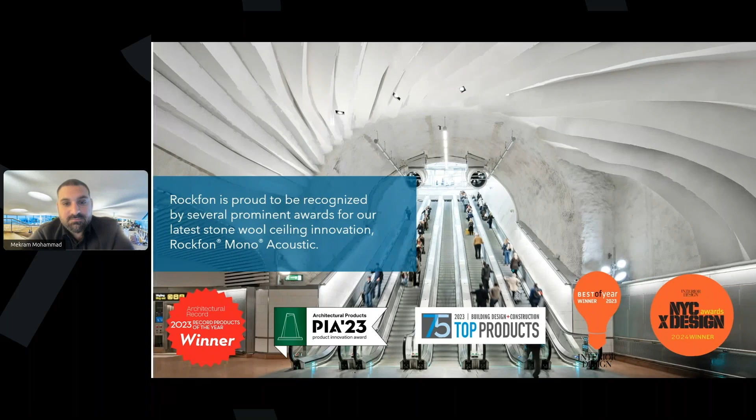So today we'll go over what stone wool ceilings are for monolithic ceilings, the overview of Rockfon Mono, the install advantages for Rockfon Mono, and training, support, and resources.

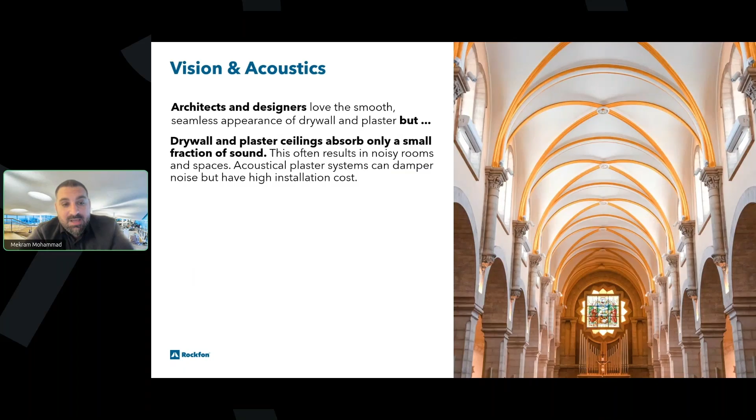So stone wool substrate for monolithic ceilings. Architects and designers really love the look of acoustical or plaster and drywall, but the problem with drywall and plaster is that they don't absorb a lot of sound unless it is an acoustical substrate. That's the reason why Rockfon Mono does a really great job. Rockfon Mono is a sound absorbing panel that can be installed similarly to drywall at significantly lower cost than an acoustical plaster. Rockfon Mono can achieve an NRC of up to 95, which is a very high NRC and one of the highest NRCs available for a monolithic ceiling.

To understand really what Rockfon Mono is made out of, we have to understand the substrate, which is stone wool. Stone wool is primarily made out of basalt rock, which is a volcanic rock, where the stone is melted at 2,700 degrees Fahrenheit and spun into fibers. Volcanic rock, such as basalt rock, is replenished 38,000 times faster than it can be used. So it's a very renewable product, and it's also a closed loop recycled product, which can be taken back into the factories and respun into either insulation or ceiling products or whatever other products that Rockfon or Rockwool can make. It's a non-directional fiber that provides excellent stability, and we'll go into those performance characteristics of stone wool.

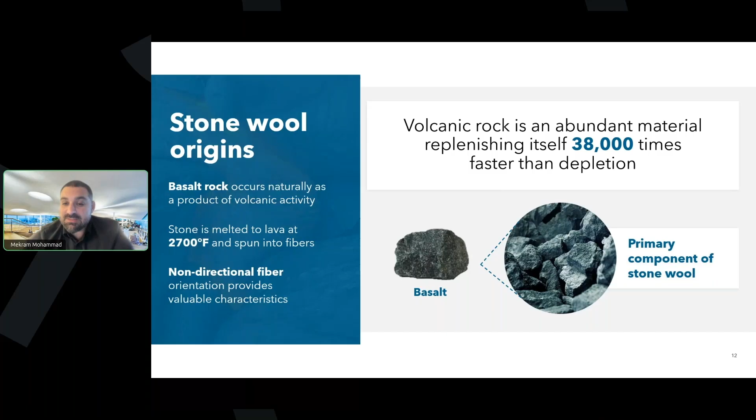So some of the benefits that you get out of stone wool for Rockfon Mono is that it does provide a very high sound absorption of 95 NRC for a finished system. The panels can be tested at 1.00 unfinished, but at an assembly of 0.95, it has a very high NRC.

One of the things about a lot of these monolithic ceilings is that the actual performance of the finished system and the assembly is really what the most important number is, because you will be installing it as a finished system versus just a panel.

Stone wool in itself is also a very highly resistant product to humidity. It's inherently humidity and sag resistant. It's also inherently mold and mildew resistant because it provides no food source or substance to grow mold or mildew on.

It's a Greenguard Gold and LEED certified product, and it is certified for seismic categories A through F. Some of the benefits are very high ease of installation, which we'll go over today, and Class A fire performance, which stone wool made out of basalt rock, a volcanic rock, is highly resistant to fire and smoke.

Because of the flexibility of the substrate, color and design options are immense with Rockfon stone wool with the mono system. It's backed by a 15-year warranty, and because it's a certified program, it comes with a lot of contractor support, which we'll go over.

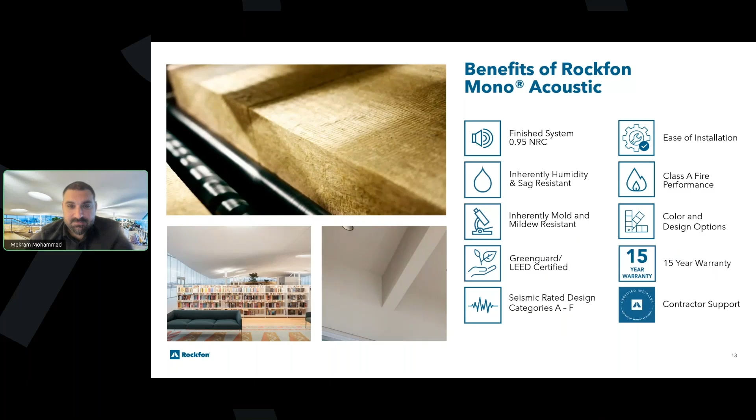So really the general composition of a stone wool monolithic ceiling panel: at its core it's a 1.5 inch thick stone wool substrate of non-directional fibers that give it a very rigid and stable substrate for easy installation.

Stone wool in itself is a lightweight product that installs very easily, that doesn't require intensive labor, and we'll go over those install details.

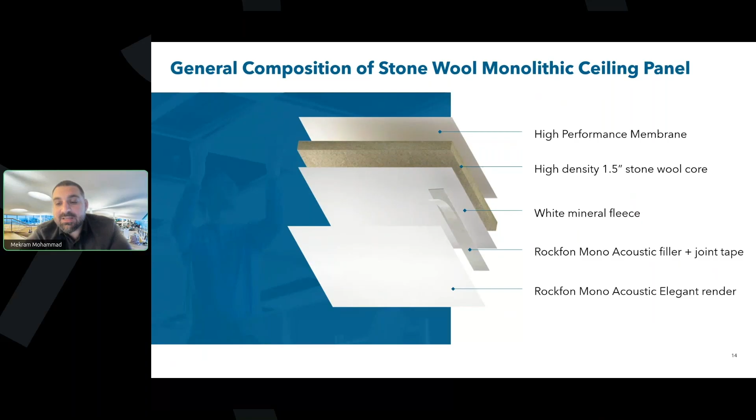Back to the high performance membrane: a white mineral fleece with the actual acoustical filler and joint tape once it's installed, and then the last layer will be the acoustical elegant render, which is a spray applied finish.

So an overview of the actual system and the different options available for Rockfon Mono. We'll start off with our first poll question here.

Perfect, yeah, so it's a great audience today—a lot of people that are familiar with monolithic ceilings. And for some of the people that are avoiding it due to complexity, we'll go over what makes Rockfon Mono a really great product for ease of install.

So there are 3 different systems. The first system is the Rockfon Mono Acoustic FE. FE stands for flexible edge, and you'll see a section drawing on the bottom, but the Acoustic FE basically is a system that is adhered to a drywall suspension system, where the panels butt up to each other with taping and mudding at the open reveal.

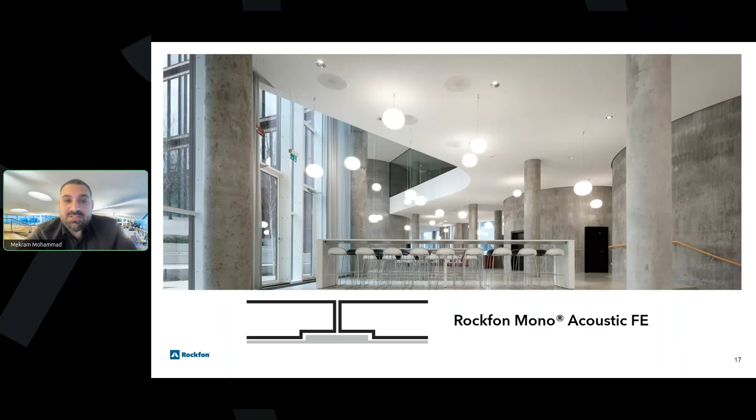The second option is the Acoustic FE Direct, which is a glued-up system with smaller panels for easier gluing, and the same edge profile where there'll be a groove for additional tape and mud to finish the ceiling and make it nice and seamless. The advantage for this is a system that does not have a lot of space for a suspension system, retrofit space, or often residential as well.

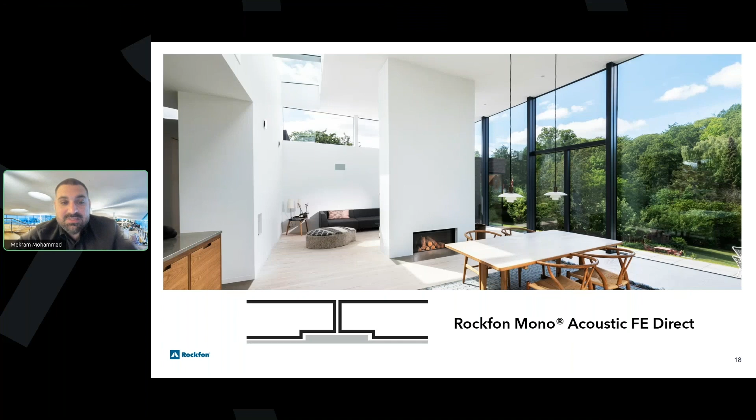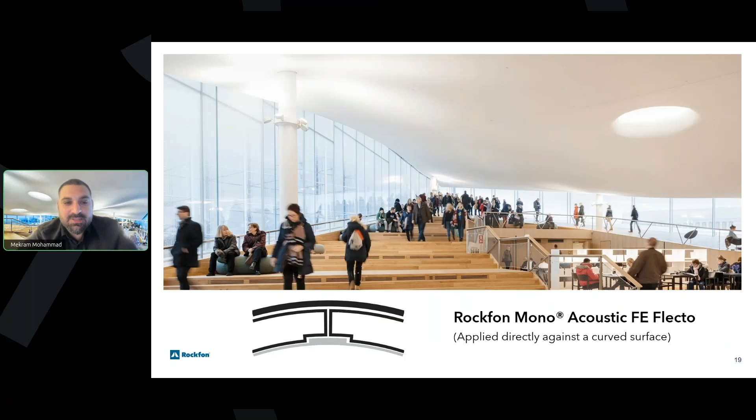The third option is the Rockfon Mono Acoustic FE Flecto. It still has that FE edge, but it can be curved with a pre-scored backer on the back of the panels with a radius of 5 foot maximum. Essentially this panel can be curved, it can be cut, it can be very flexible in some really interesting design options available. That's one of the nice advantages of a mono system made out of stone wool—it can be bent and moved around and really made the way that you really anticipate it in the field.

So a quick overview of the 3 systems. The 95 NRC system is the FE system, which is designed to be installed on a drywall grid suspension. Because there is no drywall backer behind it, it does a really good job of absorbing sound at a 95 NRC for the finished system.

The panel itself is a 1.00 NRC unfinished panel. It comes in a 4x6 panel, and it's designed to be taped and mudded at the edges and seams to create a traditional monolithic ceiling. It's basically a very standard install system, very similar to drywall.

The other option, which we mentioned, is the direct, the acoustic direct, and it is a 3x4 panel, slightly smaller. One thing to take into consideration is that there'll be additional joints to tape and mud with the smaller panels, but it does give you the flexibility of adhering to either an installed drywall, a flat surface, or an existing surface that you have.

The third option we displayed was the FE, acoustic flecto, and that option is essentially a product that can be curved and very malleable in the field, designed for some unique scenarios where curves are envisioned by the designer.

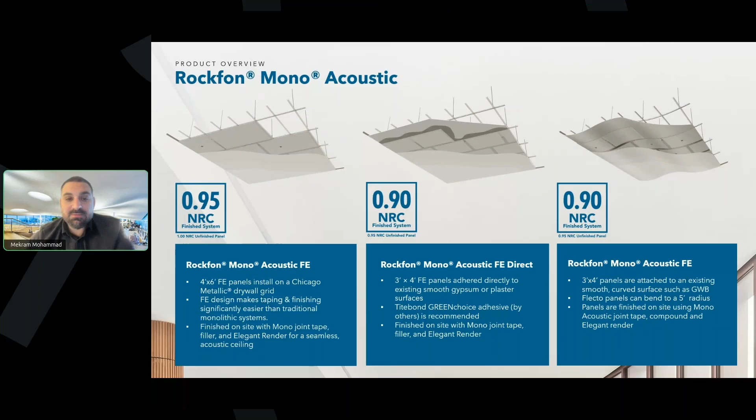Here's a close-up of the actual FE edge, the flexible edge. It creates an edge profile that eliminates a majority of the waste in the field when you're installing this. So if you have a cut panel, you can easily recreate that edge to fill in the edges, gaps, or any additional spaces you have.

It also reduces the amount of joint compound needed in that space. One of the things you want to do with a system like this is not overly mud the system. When you do, you're essentially covering up the sound absorption area, so the less additional or extra mud you have, the better. It also makes in-field cuts easier, and intersection brackets are made easier as well.

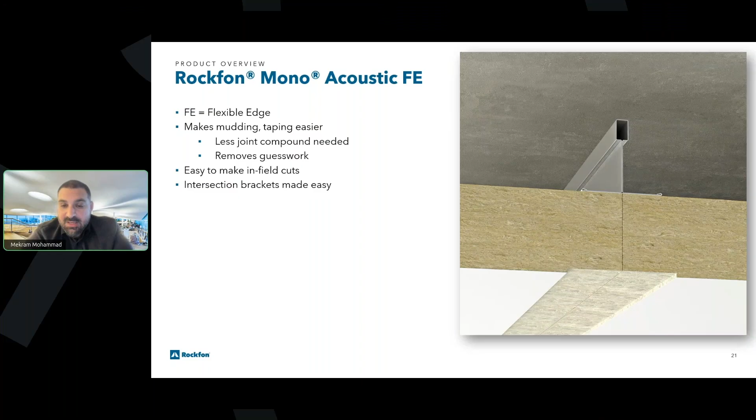We'll go over what those intersection brackets are on the next page. These are the components used to actually install the Rockfon Mono system.

The first option is the grid suspension system. If you're installing it on a suspension system, you'll install the grid with the layout of the panels. The acoustic FE panel is then adhered to the grid with a screw, so you can screw it in directly to the panel with no additional glue or anything like that.

You'll use a gypsum screw to screw it into the actual center points of the panel itself to hold it up. Once you have multiple panels up, you'll install the intersection brackets, which join the two panels together, eliminating the need for individual screws required for each panel.

You can actually double up the screws when using the intersection bracket, using one screw and one bracket for the adjacent panels. Rockfon also provides the washers, the mono acoustic tape, the powder filler, and the elegant render. This is the full system we provide to make it a lot easier to actually install.

When you're looking into a mono system and need a material list, Rockfon will include all of these items to make it easier to install. We try to provide the full package and make it as easy as possible to get all the material you need. Because of that, you'll have a powder filler that's proprietary to Rockfon, as well as the elegant render.

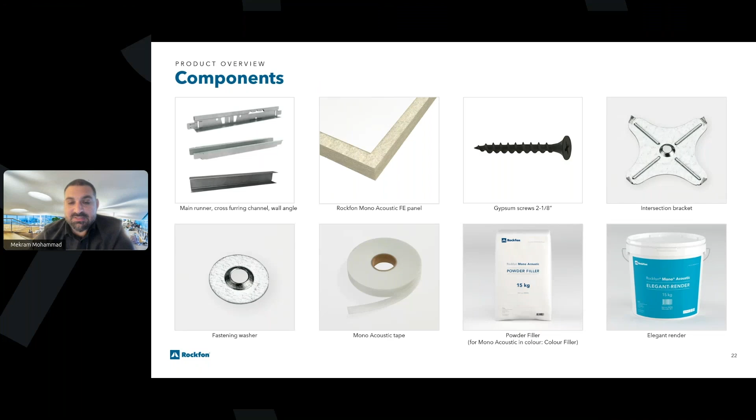I mentioned colors. These are the 33 colors available for Mono, so when you're ordering the system, you'll choose the color you want. Obviously white is the most popular color, but these are the additional colors you can use as well.

These coincide with the Rockfon Colorall panels used for tile and grid, so we made a very nice seamless transition from Rockfon Mono to the Rockfon Colorall ceiling tiles as well. Some of the things we've heard from designers is that they really like these colors, and we made it really easy for them to choose the color they like. We're really excited to be offering colors with the Mono as well.

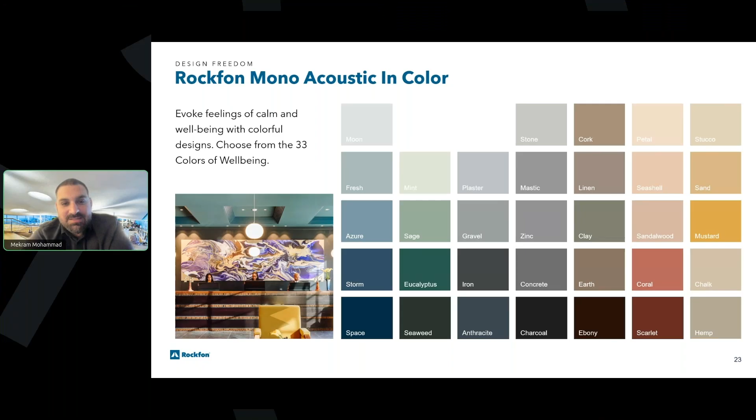This is an installed project where you see the charcoal color installed. The render itself is the charcoal render that is used to be sprayed inside the sprayer, so you don't want to use any other type of dye or anything like that. You'll want to make sure you're ordering the correct render color to spray into the system to achieve the look you're looking for.

Seismic is also a very strong consideration when you're installing a system like this. Rockfon Mono is designed to be installed in seismic categories from A to F, so it can be installed in very severe situations that have severe seismic constraints. You can rest assured that when you follow the system for the seismic install, Rockfon Mono will be compliant with those regions.

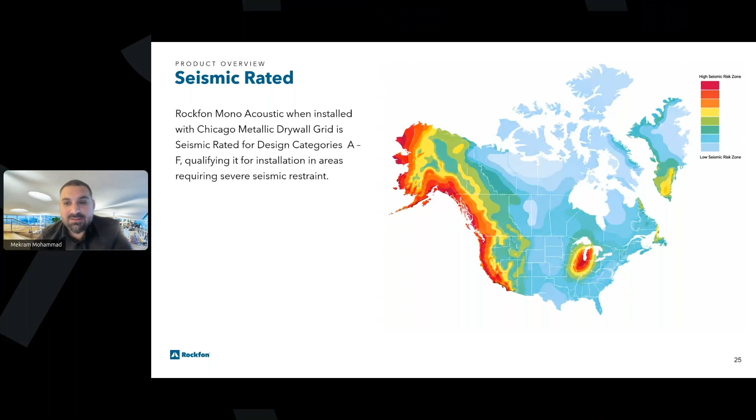I know a lot of West Coast people, some in the Midwest, and some on the East Coast as well have some severe seismic risk zones.

So the Rockfon Mono install advantage. What really makes Rockfon Mono advantageous for speed and flexibility is also providing a system that can be installed with the manufacturer backing the certified installers.

It's a certified installer program where we bring contractors and subcontractors out to Chicago, where our facility is for the mono install program. From there, it's a 3-day program where we test putting up panels, putting up suspension systems, the Chicago metallic drywall grid, and testing out the intersection brackets, taping and mudding. It's a great place to actually learn without learning on the fly in the field, and to understand best practices for a system like this.

With a monolithic ceiling system, you want to make sure that the joints are looking perfect and great, without overspraying the system. We'll go over what that exactly looks like.

We start off with the grid installation if you are using the Acoustic FE, which is the system that installs on a grid suspension. In that scenario, you'll have the grid laid out and the panels screwed into the drywall grid from there. That's typically the system we do the training on, because it involves the additional step of adding the grid and screwing in the panels.

If you are not using that system and you're using the Flecto system, you can screw it in just for stability, but typically you'll use a structural adhesive like Titebond or Sika Bond, or any of those options, to glue up the panel itself.

When you're putting up the intersection brackets, the first thing you'll notice is that there's a screw or two used in the middle to hold up the panel. Once you have the first screws in the middle of the panel, you'll install the adjacent panels and then start installing the intersection brackets to connect the two panels together.

This eliminates the overall number of screws you're using to install the panels, providing a much faster install with fewer screws. You don't need any type of glue or anything like that if you're using the standard install.

From there, you'll use the powder filler that's provided for the mono system. It's mixed on site, and you'll use the tools to make sure you're filling in the groove between the two panels. Because of that groove, it eliminates a lot of additional mudding needed for the joints, but you'll still need to make sure you're putting enough to completely fill up the joint.

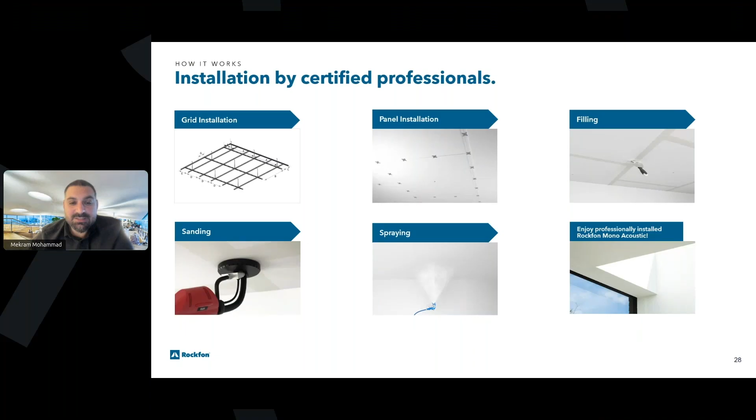So when you're putting up the panels, like we mentioned, you'll have the screws in the middle of the panels to hold it up, and then the intersection brackets to join the two panels together. The intersection brackets are installed approximately 12 inches along the main runners and 16 inches along the cross tees. And you'll want to install screws and washers along the perimeters, 12 inches apart, and one or two in the center of the panels. It just depends on the layout of the actual ceiling.

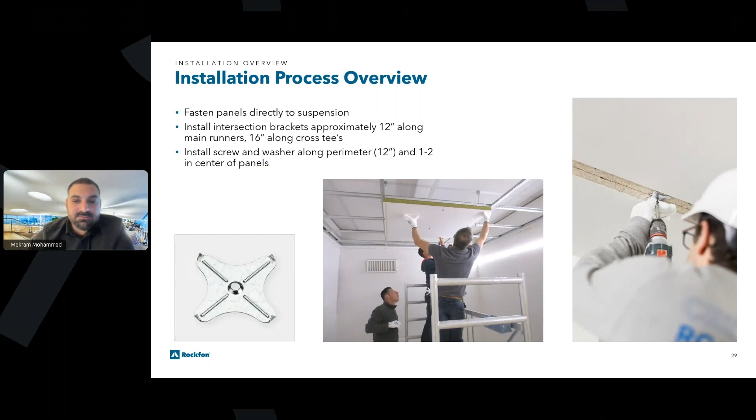So for the powder filler, which we mentioned, you'll use the Rockfon provided tape as well as the powder filler to fill up the joints. As we mentioned, use enough to actually cover up the joint, but don't over-mud it to the point of covering up any of the sound absorbing material. This reduces a lot of waste by not having super big mudding lines or anything like that.

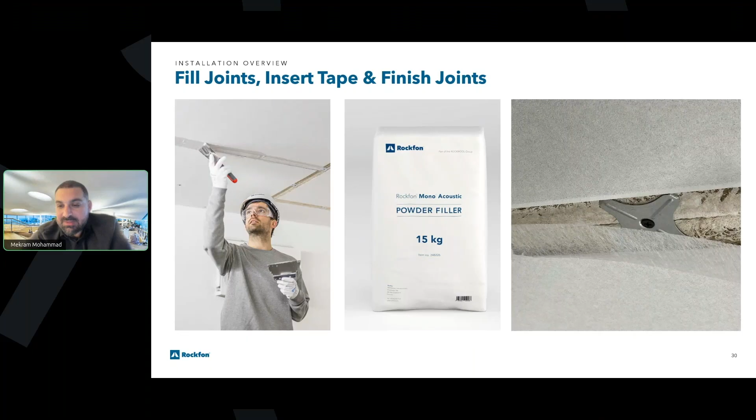So typically for the filler coats you'll use two coats with sanding between coats. It takes about 6 to 10 hours to dry, depending on the humidity inside the space. So when you're taping and mudding, that's why we mentioned not to under-mud, because if you wait too long, you will lose those hours by having to reapply the actual mud.

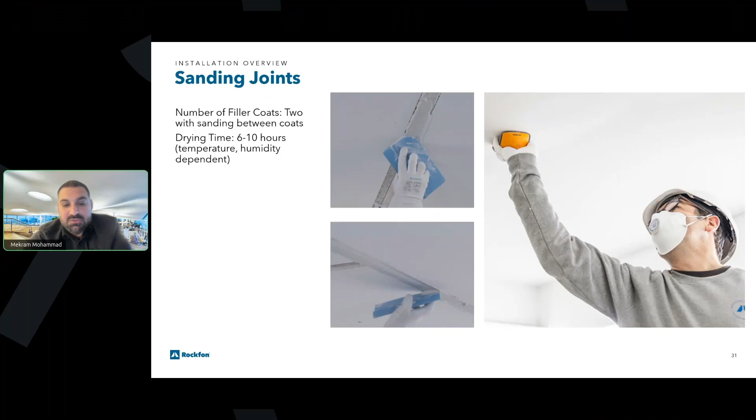But once you have everything nice and flush, you'll be ready for spraying. So the Graco Mark V is what's recommended, and the 635 tip is the tip that we use for the actual sprayer.

Mono render is ready to use, so you don't have to have any water or additional materials needed for mixing. You could use a hopper to place the material, or you put the bucket directly into the machine for the airless sprayer machine that you have on site. And we go over all of those install details when you're actually in Chicago for testing out the sprayer.

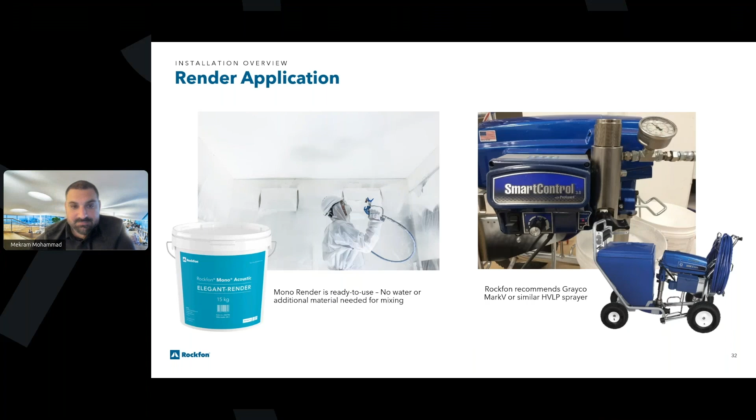So you'll typically want to spray the perimeter first and then full surface across. You use the airless sprayer, similar to the Graco Mark V, with the spray tip of 635, and the pressure is at 150 bars. The distance to surface is 3 to 4 feet, and if you have a taller ceiling, you can use an extension. We typically recommend a maximum of 6 to 8 feet for the extension, but you want to be between 3 to 4 feet away from the actual spraying surface.

The number of coats that we require is a minimum of typically 3 coats. You can do additional if you need to. So the typical recommendation is 3, which allows you to do any repairs or resprays in the future without significantly reducing the actual sound absorption of the panels.

What I did mention before is that you want to make sure that you're always using the render that is provided by Rockfon, because any other type of render or paint that is used could clog up the holes that are used to absorb the sound. The drying time between each coat is typically 3 to 5 hours, and obviously that also depends on the humidity inside the space.

One of the things that's unique about the stone wool substrate is it does not need to climatize to the environment beforehand, so the actual substrate can be installed once it's on the job site without needing to climatize. But the drying times, depending on the humidity, can be variable based off of high temperatures or high humidity. All of those can affect the drying time of the space. So we recommend a humidity reader, fans, and dehumidifiers if necessary to maintain the temperature and humidity inside the space.

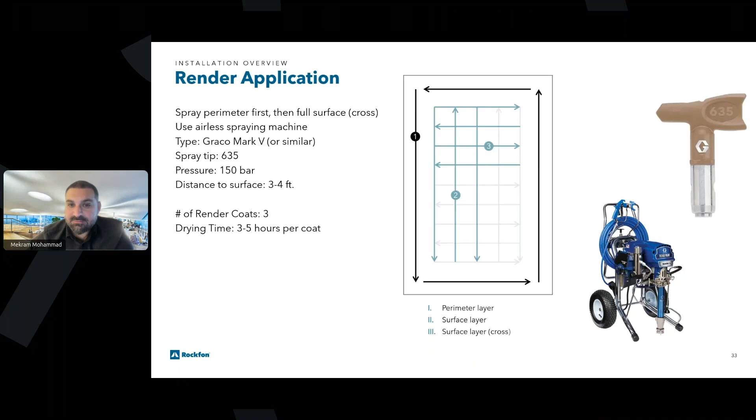This is showing a very unique application that shows the design flexibility of Mono. This job is in the station city in Stockholm, Sweden. The actual inspiration was Marilyn Monroe's dress for this space. This shows the capabilities of Mono and how flexible of a material it is, and how it can be installed in some harsh elements, such as a subway station, which can be exposed to higher humidity levels since it is oftentimes not in a fully enclosed space. That's some of the advantages that stone wool provides for a system like this.

You can see that a system like this does require a lot of on-site supervision. This requires a higher level of detail, full collaboration between architects, designers, manufacturers, and installers. So this is obviously not going to be your typical job, but it does show the capabilities of what Rockfon Mono can do.

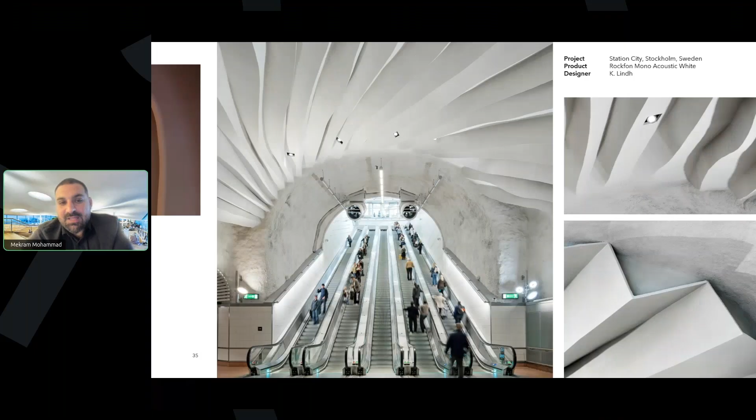With a system like this, there's obviously a lot of training that is required, along with support and resources available for the installers. Rockfon Mono is a product that requires a certified installer certification to be installed. What that entails is a hands-on, multi-day technical training with the product in Chicago. We have pods available for installers to come and experience setting up the material, all the way from the grid to the final steps of spraying. Once completed, you get a certificate of successful technical training. Rockfon Mono is a product that can be installed only by certified installers.

Some of the advantages of being a certified installer: when Rockfon products are specified, we work directly with you to get pricing and recommendations for the job site. Additionally, you get access to detailed step-by-step installation guides and are annually updated and trained on developments within Mono, such as this year's newest update, the addition of colors for Rockfon Mono.

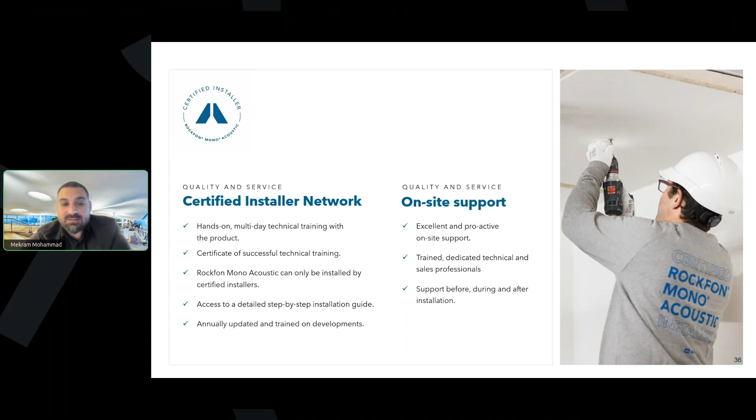Some of the accessories we provide with the Rockfon Mono include the Chicago Metallic Infinity, our extruded aluminum trim for drywall applications that can be used for the mono as well. The Infinity D, which is the Infinity for drywall, can come in curved or straight applications, and comes with a tapered edge and is primed, ready for painting to match the finish of the actual mono once it's installed.

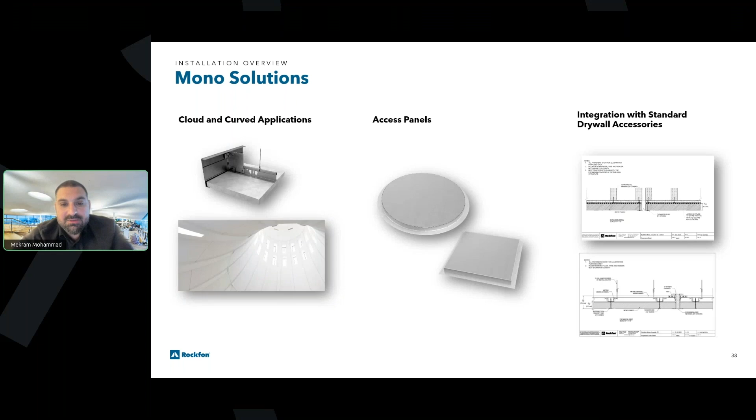Submittal-wise, Rockfon also has data sheets on the website, BIM illustrations such as DWG drawings, AutoCAD drawings, and PDFs available for the mono panels. We also have the warranty information for the 15-year warranty.

We also have the installation guide available, cleaning and maintenance guide, specifications, and safety data sheets available as well. There's additionally the sustainability documentation, such as the GREENGUARD Gold certificates, and all the additional sustainability information.

Speaking about sustainability, the EPDs are available. The GREENGUARD Gold certificate is available for the Rockfon Mono, and it contributes to well building criteria. If you're aware of well building standards, a lot of times they recommend a 90 NRC or higher for their buildings.

Rockfon Mono, since it's made out of stone wool, qualifies for the Rock Cycle program, which means at the end of its use it can be taken down and recycled back into stone wool, put back into the factory where it's remelted and turned back into a stone wool product for use again.

One of the unique benefits of the Rock Cycle program is that the stone wool itself does not lose any performance values. It's a closed loop recycling program, which can be recycled over and over without any loss of performance for the panels themselves.